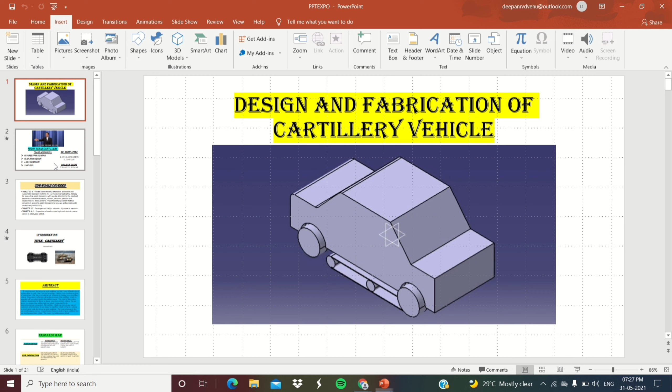I will put this in full screen mode. Our project is to design a Cartillery vehicle. Cartillery vehicle is a combination of a normal vehicle and an artillery vehicle, not the whole vehicle but just the wheels of the vehicles. You can see the design. I think you have gotten the idea of what the project is about.

So what is the research gap, what did we do? In the existing method, the artillery vehicle, that is military vehicles, will travel on all kinds of roads, especially in defense fields, and the normal vehicle travels on wheels on our normal roads. So what is our innovation? We have joined these both so that a vehicle can travel on all surfaces without any difficulty.

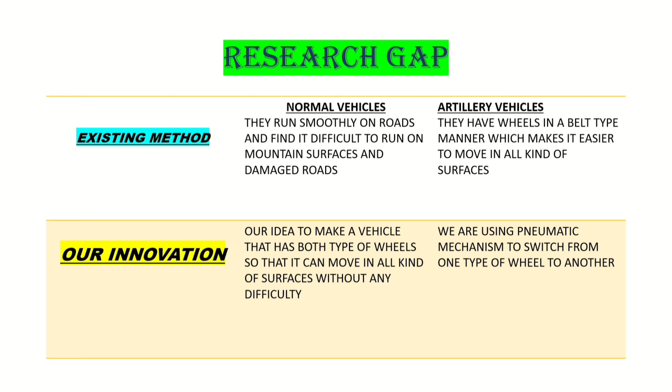For lifting the wheels, the artillery wheel is fixed under and in the middle of the vehicle. We have to lift that, and we are using a pneumatic mechanism.

Now let me tell you the working in detail. Consider a car moving smoothly on a flat road like this. Next, when you have to pass through rough roads, in Tamil you would say 'kundum kuliyumana' roads. When you pass through this, you will feel somewhat uncomfortable, and if the maintenance of your vehicle is not good, it leads to a puncture definitely.

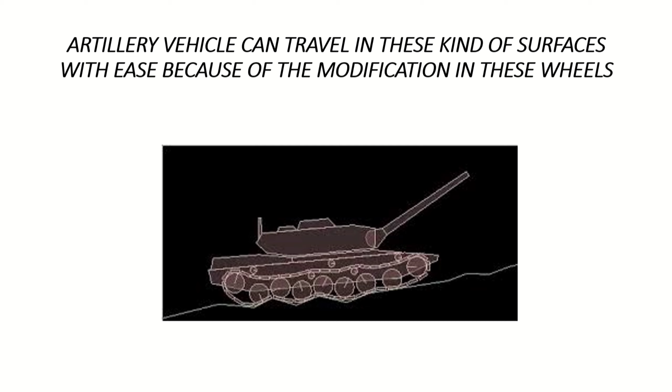Our artillery vehicle, as used in defense, can travel on all kinds of roads. You can see in the image, it will alter these wheels inside the belt so that it can travel comfortably.

The rough sketch of our project is as follows. You can see the rough idea: the normal wheels are grounded to the surface and the artillery wheel is above the ground surface, that is, inside the vehicle. When we use the pneumatic mechanism to keep the artillery wheel down, it comes down.

You can see in the second image, that is titled after. You can also see the bottom image: there are 4 corners of the vehicle, with 4 normal wheels, and in between, above the ground surface, we have the artillery vehicle wheels, that is, belt type wheels.

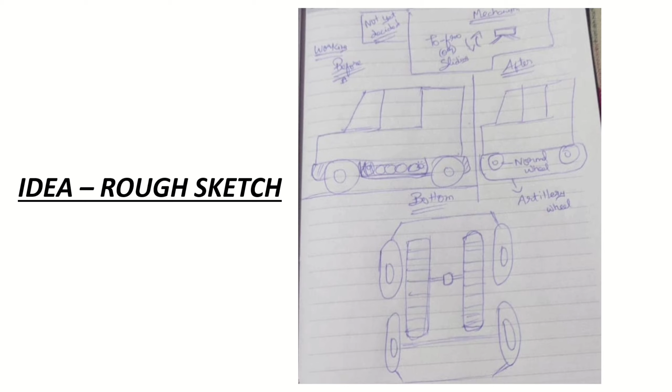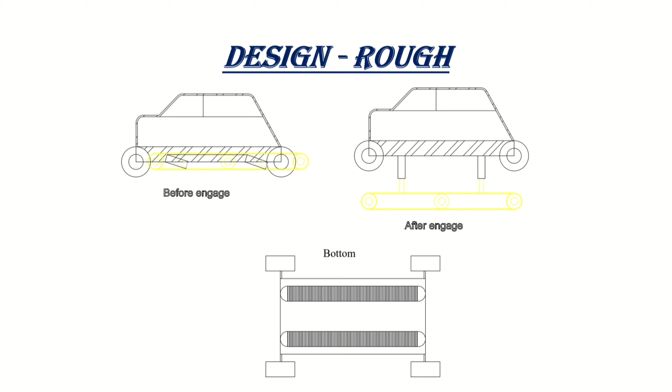The design of our project is as follows. This is a simple design so that anyone who doesn't know design software can also understand this. We have used a pneumatic mechanism. As we are doing only a prototype, we are using the pneumatic mechanism in the form of syringes.

Pneumatics differ vastly from hydraulics. We have used a pneumatic mechanism as the cost is very low compared to hydraulics. This is not our project - the orange toy is not ours. This is just an example to show how we are using the pneumatic mechanism.

On the left and right, we have used 2 syringes and 2 syringes, so that when we push up and down, the toy moves up and down - it's a to and fro movement. I think you can clearly understand from this image, or else just Google 'pneumatic mechanism using syringes' and you will come to understand the concept very clearly.

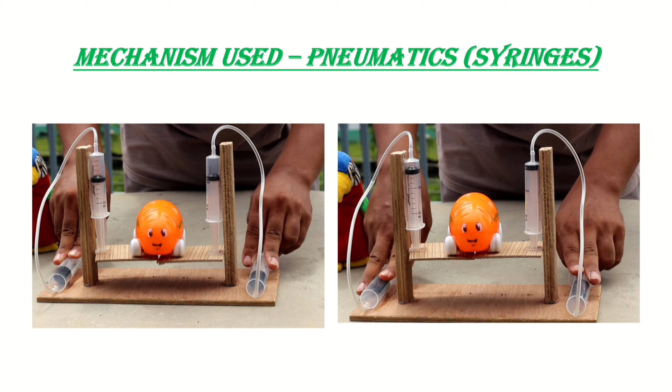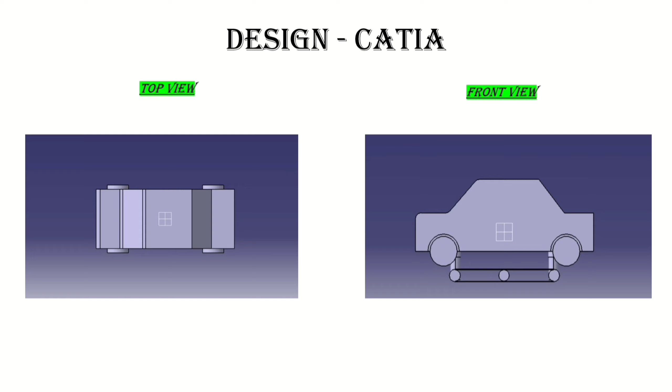These are CATIA designs - CATIA is a designing software, I think you may have come across it. Using that software, we have designed our project. This is the top view, front view, bottom view, and isometric view.

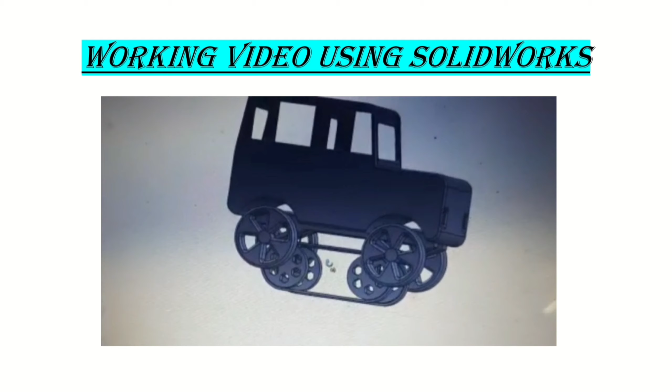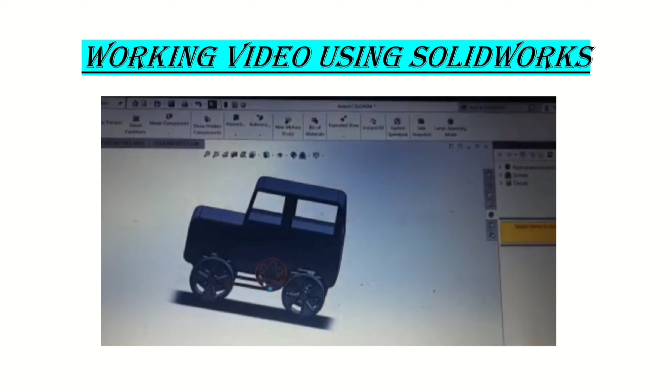You can see the four wheels on the outer side and the four wheels on the inner side. The inner ones are not just wheels, they are flat belt-like wheels, like the artillery wheels. Now it goes up, as in the vehicle, and it comes down when we use the pneumatic mechanism, like this. I think you can clearly see.

If not, see it again. This is the running position of the artillery vehicle - the normal wheel goes up and the artillery wheel comes down, so that using the artillery wheel it moves.

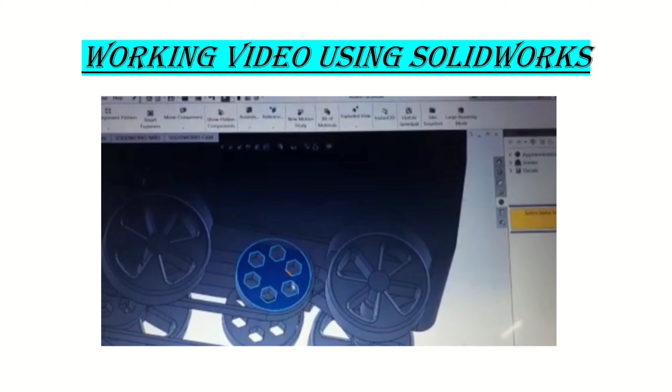This is on the normal surface. The car travels using normal wheels, and when we use the pneumatic mechanism, it comes down and travels using that belt-like surface. The whole car moves using artillery wheels.

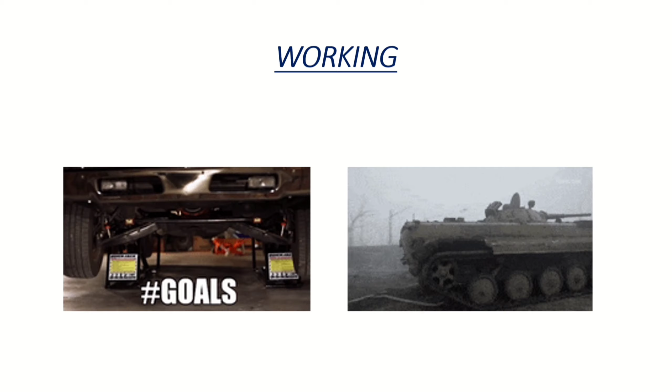I think by now you should have an idea what our project is all about. The advantages of our project are: puncture of tires can be avoided, and using the same vehicle you can travel on all kinds of roads, and maintenance cost is also very low.

The main point of our project is that this type of vehicle does not exist till now. So if our project is a success, in future it can be used as a defense field vehicle.

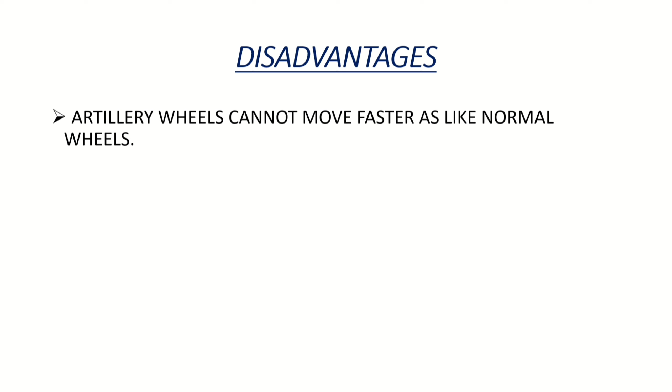Disadvantages also exist, as a coin has two sides. The main disadvantage is it cannot move as fast as a normal vehicle, and if one wheel of the artillery vehicle needs repair, we have to change the whole setup.

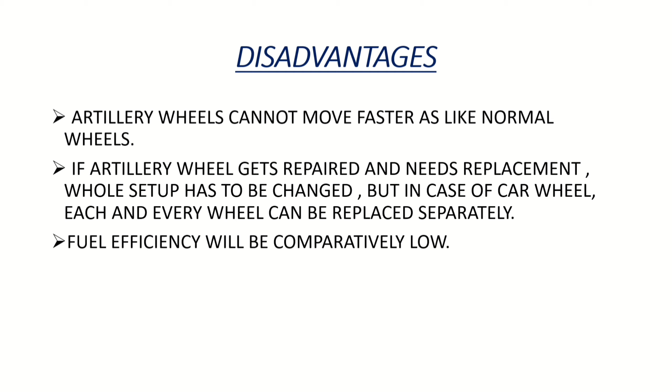In case of normal vehicles, each and every tire can be changed, but this is not possible in our vehicle. Fuel efficiency is also comparatively low, as we are using belt-like tires, and it has to pull the whole vehicle with a person sitting inside.

Fuel efficiency will be low, and as we are doing only a prototype and not the full model, the cost estimation is done for just a prototype.

A prototype is nothing but a toy-like structure of the actual product you are going to make. It's just an example product in the size of a toy. Prototypes can also be done in a big size, but we are doing a small size like toys.

Why spokes? We are going to design the body of the vehicle using spokes, the same spokes that are used in cycle tires.

So the cost of the spokes is approximately rupees 50, and for wheels, we are going to purchase wheels and military vehicle belt-type wheels from outside. We can also design that ourselves, but to finish the project in time we are going to purchase it. If purchasing, it will cost around rupees 600, and if we do it on our own it will come below rupees 500.

And syringes, why syringes? We are using syringes to implement the pneumatic mechanism. If using hydraulics, you have to buy cylinders, so we are using syringes as we are using pneumatics. This is cost efficient and it will also work.

You can also see pneumatic mechanisms used in various projects, many projects. Many have done JCBs also using pneumatics, so that costs around 50.

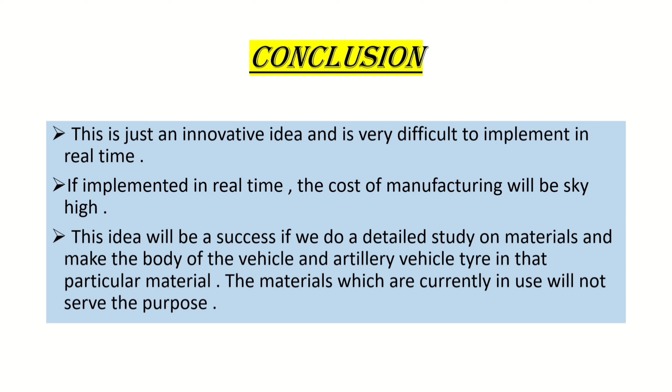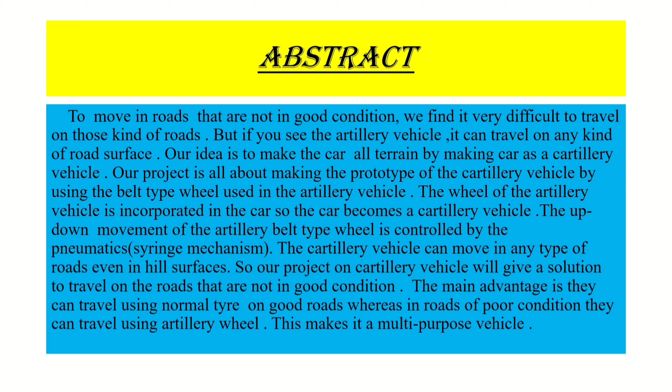So I think I will be clear - sorry guys, it's a grammatical mistake. I think I was clear in my point in explaining the video. I think you all got a clear cut idea about my project.